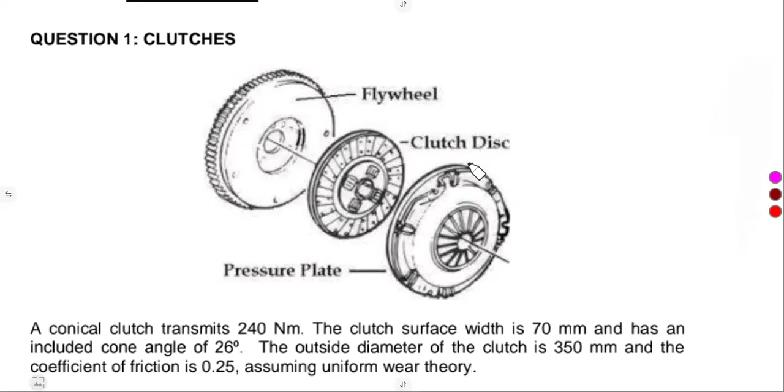So in this case, we are going to consider a typical exam revision, still working on our clutches as we had our formulas before. This part that we are given was from the April 2024 exam. They give us a typical diagram showing the flywheel, the clutch disc, and the pressure plate. The information given here was actually direct and straightforward.

So we're not going to waste our time, guys. Let us quickly take our information as we are given. This is a conical clutch that we are given, so we are dealing with a cone clutch.

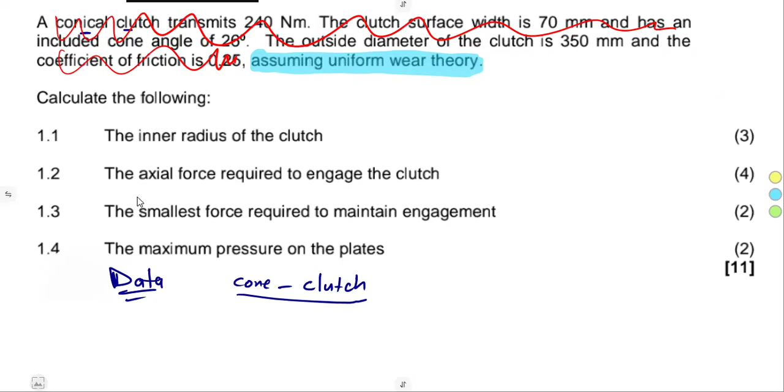Now, on the information, they are saying for this cone clutch, assume uniform wear theory. Remember, guys, I talked about this. As long as you are dealing with a cone clutch or a plate clutch, go back to the uniform wear theory or uniform pressure theory - they follow those two theories. So anyway, we are going to take that into consideration. As we are given here, this cone clutch follows the uniform theory.

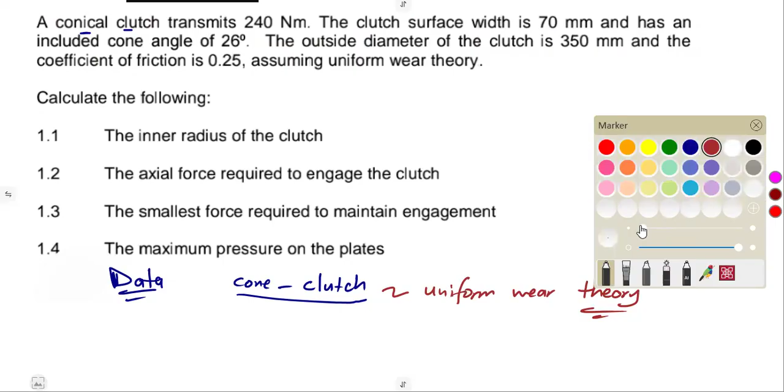That is the uniform wear theory. So in your calculations, you are supposed to put this into consideration. Remember, when you are working with the uniform wear theory, what exactly are you working with? You are working with the old or worn clutches.

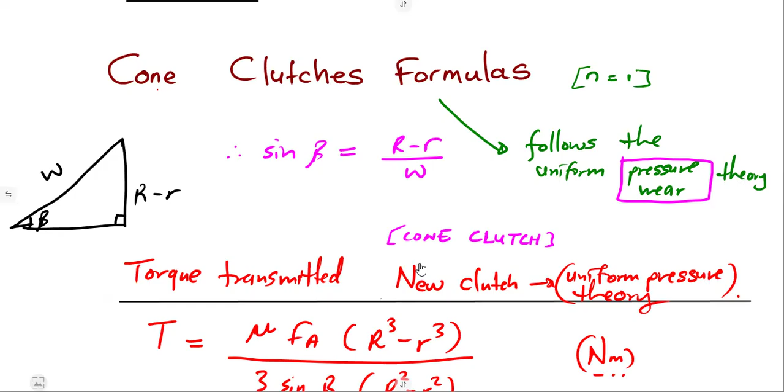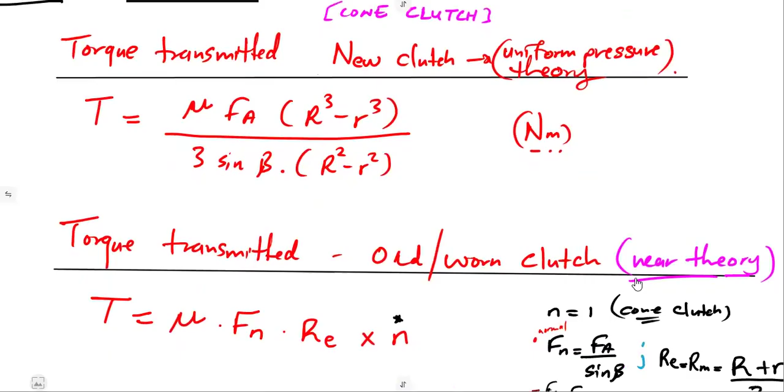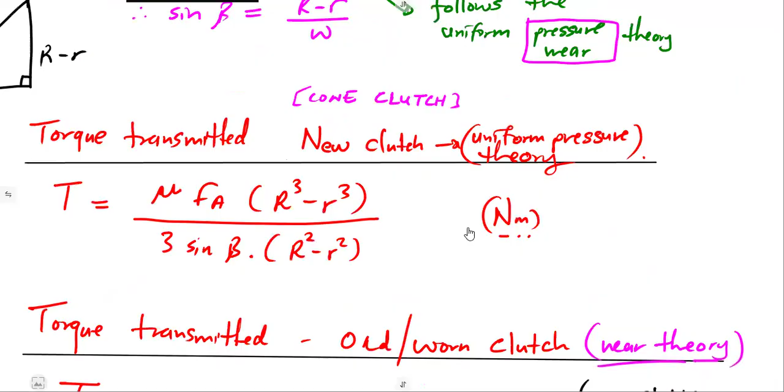Remember those formulas that I listed before. It is good that when we worked with cone clutches in our previous class, I mentioned what is important: the formulas for the new clutch, and also for the old clutch working with the wear theory. So we already listed these formulas specifically, mentioning each and every type that you are given. We do not have a problem with this part because we have the information. So let us take our information and see what we are given.

So we are given that it transmits 240 Newton meters - this is the torque that we are given. It transmits a torque of 240 Newton meters. Then the clutch surface width is 70 millimeters.

This is the width of the clutch. So the width of the clutch, if we divide by 1,000 since this is in millimeters, it becomes 0.07 in meters. Then it has an included cone angle of 26 degrees.

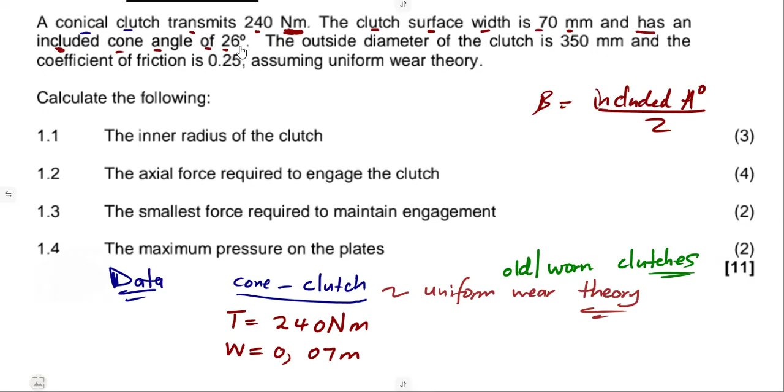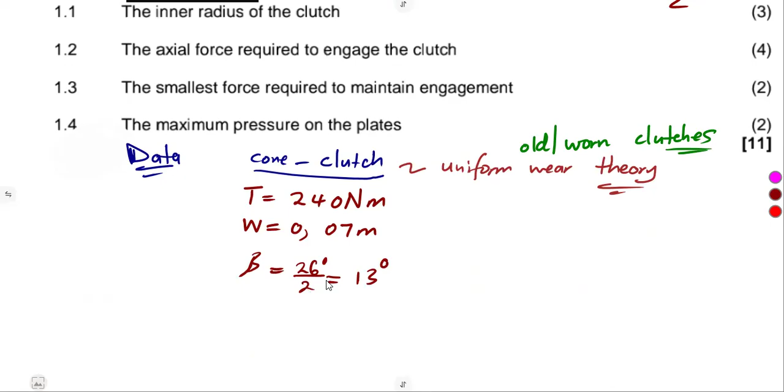Take note, included angle. So I told you guys, from the included angle, you obtain your beta - the included angle in degrees over 2 - that gives us our beta. So we divide 26 by 2 to obtain beta. Remember, beta is a semi-angle, a half angle - so it's half of the included angle. Unless they specify directly that it's a half angle, but since they say included, you divide that one by 2.

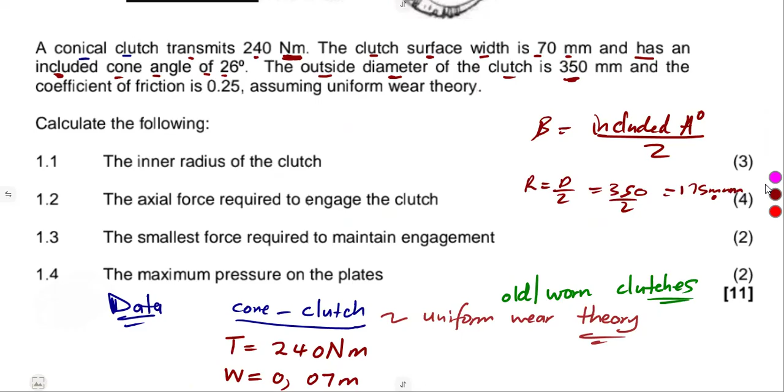The outside diameter of the clutch is 350. So we know that from this outside diameter, guys, we're going to obtain the outside radius. So 350 divided by 2 gives us 175 millimeters, then divide by 1,000 to get meters, so that gives us 0.175 in meters. And we are also given the coefficient of friction, which is 0.25.

Assuming wear theory as we are given there, the coefficient of friction is also given as 0.25. Remember, we are told it's a cone, which follows the uniform wear theory.

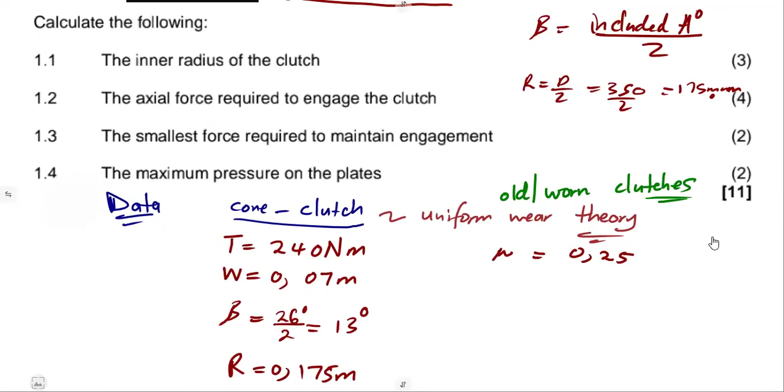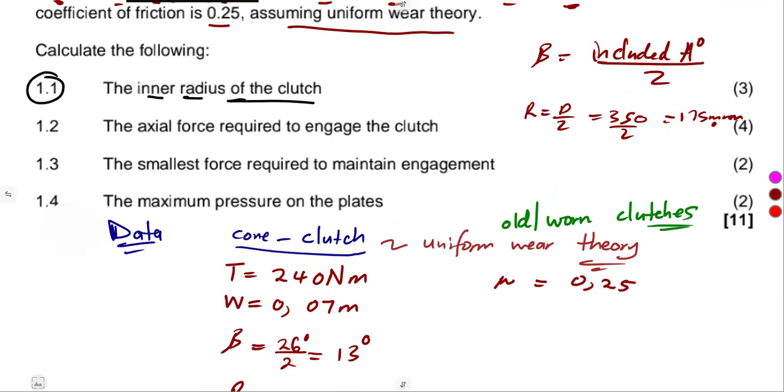So from this consideration, we now have the question, which was to calculate 1.1, the inner radius of the clutch. So when we had our introduction, even in those examples, guys, we had a typical question like this where the inner radius had to be calculated.

We have the width of the clutch here, remember? We have got the width of the clutch, we also have our outer radius, and also we have got our beta, our included angle. So we know that these can give us the missing radius that we are to find. So that is 1.1 - we need to determine the inner radius.

Remember, I explained this triangle concept that we can use to determine anything that is missing, provided that we are given any three from the formula. So there we are going to use this triangle, guys - that is the one you're going to draw. Then from that, you substitute your values. Remember, we say the sine of beta is equal to the opposite over the hypotenuse, which is this formula that we have here. So I'm not going to redraw that triangle, guys.

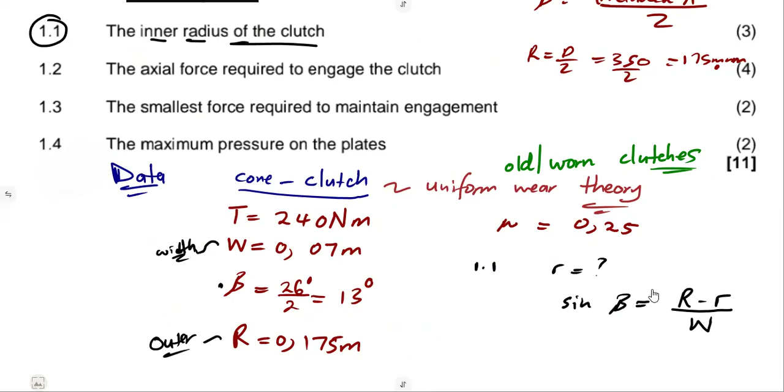All right, so this is the formula that we had at the end. Remember, guys, we had a question like this on examples, so this is just a repetition. What we need is the internal or inner radius.

So let us make it the subject. This is same as over 1, so we can cross multiply here. That's W times the sine of beta. These two cross multiply, so it's going to be W sine of beta, which is equal to 1 multiplying this part, that's R minus R that we have.

Remember, I want to make this the subject. It is carrying a negative where it is, so let us take this side so that it can be positive. Taking minus R to the right, the left side is going to be positive, meaning we are left with this one on the right side.

What about this part? We have to take it to the other side, we do not need it. Remember, we want to make this the subject, so the moment it crosses the equal sign, it becomes negative. So it was going to be negative W sine of beta, like this.

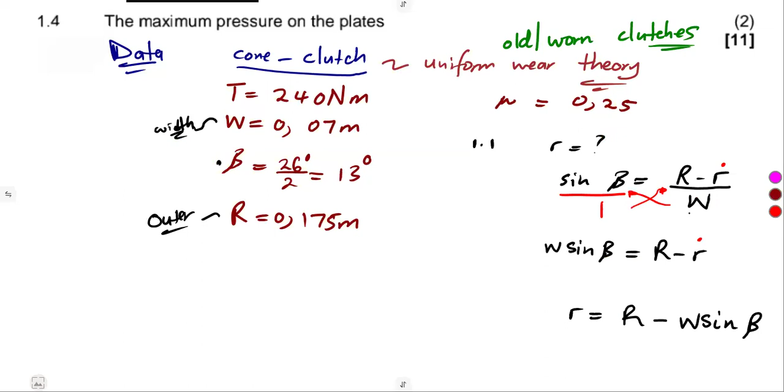So this is the formula, guys, that we have manipulated to make R the subject, where we can simply substitute these values as we have them. So our inner radius was going to be what? Since these values are in meters, it follows that our answer is going to be also in meters. So that's 0.

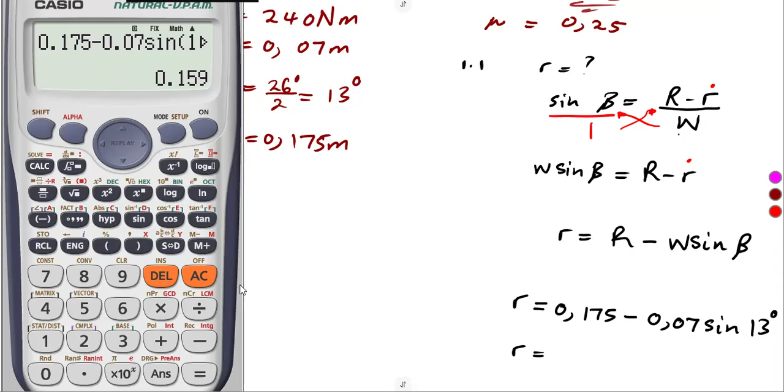0.175 minus our width of 0.07, the sine of beta, which is 13 degrees. So this is it, we were going to have our inner radius: 0.175 minus 0.07, the sine of 13 degrees, like this. So that's 0.159. We can even fix this to 3 decimal places: 0.159.

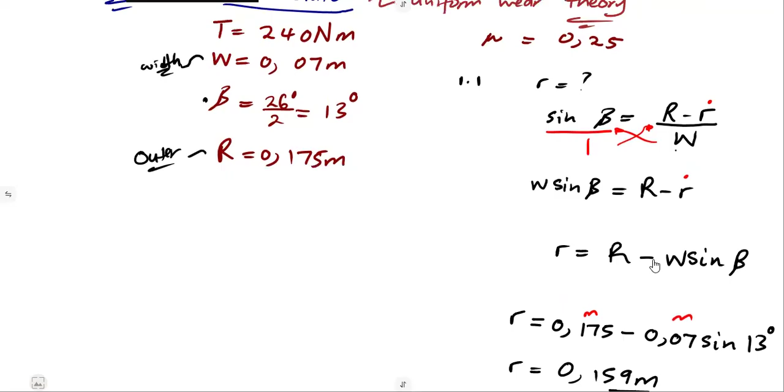Like I said, it is in meters. Since this one is in meters and this one is in meters, whatever we have there after subtracting is in meters also. So that's our inner radius. We're going to take it and save it in our information. So we just calculated our inner radius, and that was 0.159.

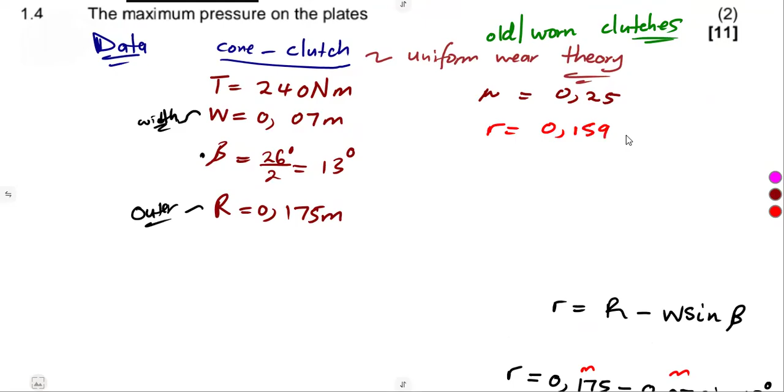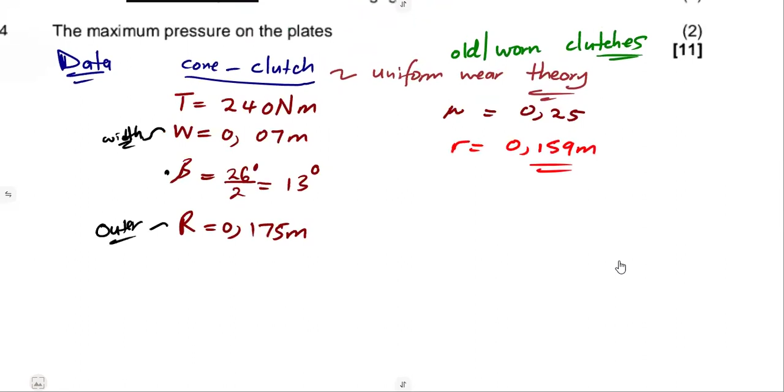In meters. You can even convert it to millimeters because you're not told whether to have your answer in meters or what. But for the sake of other calculations, we know we'll be dealing with meters, so it is best for us to have it in meters like that.

They said radius, not diameter, guys. This is inner radius. Find the radius, you end there. Do not multiply that one by 2. Multiplying by 2, you're now determining the diameter, which is not part of our question.

All right, then I talked about this. Maybe some of us did not understand me. I remember now, let me talk about it. If we remember when we talked about the torque, it's something else. It's no longer about this question that we just did. It's fine, we are done with this one.

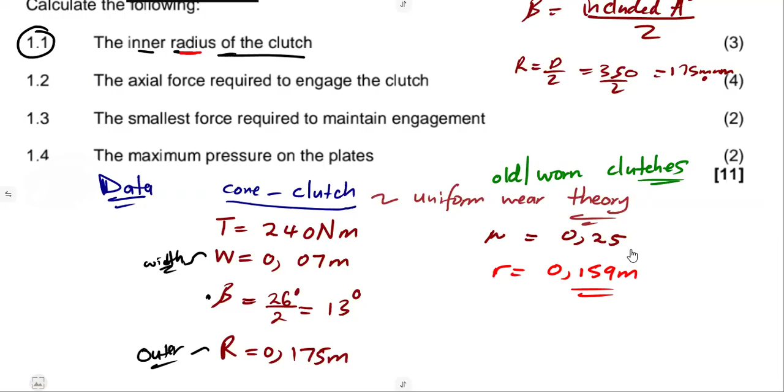Remember, I talked about the error that is in our textbook. That was the TVET series. Yeah, it's supposed to be the TVET series, which made a mistake. It was actually a mistake, and that one continued throughout. That's why I have to focus on this one, because it was not on one page but almost everywhere when they write about the torque that is transmitted.

All right, it is here. Sorry, I talked about it here so that we can be together. Remember when I talked about this formula, especially for those on membership, you can understand much because that's where I focused on that question, where this is the formula we are supposed to use to calculate the torque as long as we're dealing with old or worn clutches.

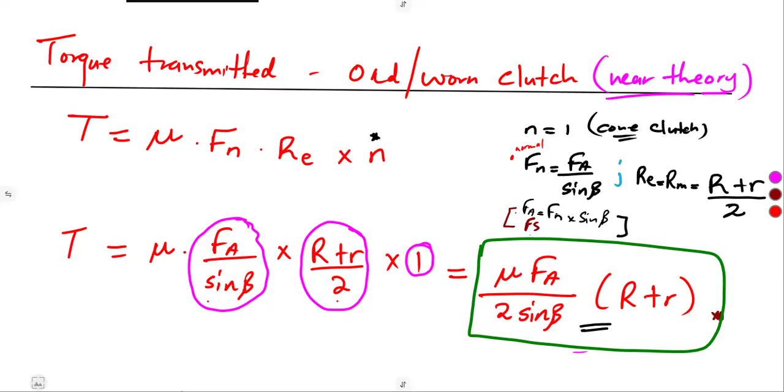That is wear theory, okay, I talked about this. The mistake was using a 4, right? On their formula, they used a 4. So if you check, they used a 4 throughout. I want us to confirm that, because I talked about this, that if we bring this information, all right, let me take my formula.

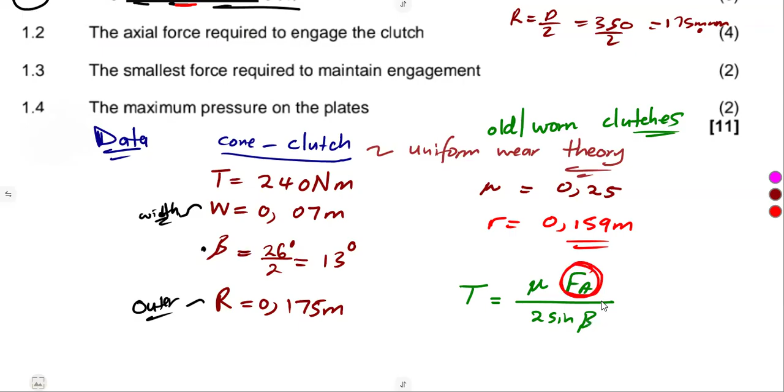I'm saying the torque is given as coefficient of friction times FA, everything over 2 sine of beta, like this. Let's say you have this FA, and you calculated or were given the axial force. In this case, we do not have that one, but let's say you have that axial force and you substitute it back. You are going to see that you get exactly the torque that you're given. But if you use the one with a 4, you won't get those answers.

So I want you to work out those as an individual, just try to see how these are going to work out. Remember, when you're dealing with the axial force, it depends on the condition given from the pressure that you're also working with, so we're not supposed to confuse that question. Anyways, we'll talk about it. I just remembered this when I saw this question here.

So, the axial force required to engage the clutch. Remember we talked about these formulas to engage the axial force. To engage, which we can write as FE, depending on your textbook or source, it is equivalent to FA into 1 plus coefficient of friction over the tan of beta. We listed these formulas previously, so it's not a problem here.

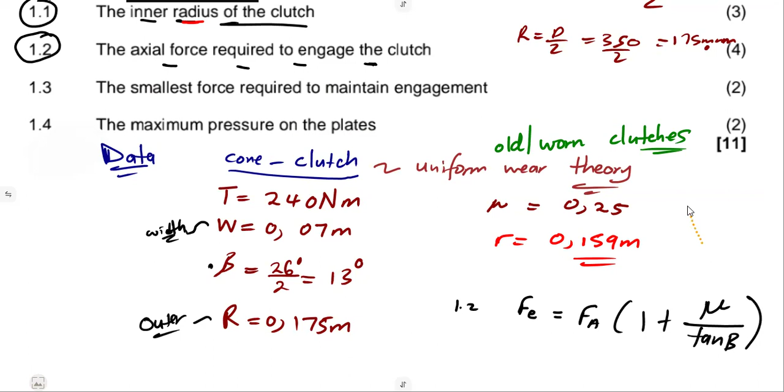We're just going to substitute, but we do not have this axial force, and in our case we do not have the coefficient of friction - we have it, the beta is there. So what is going to be the case to calculate that axial force? We're told our condition is that we're dealing with an old or worn clutch, so how are we going to calculate our axial force?

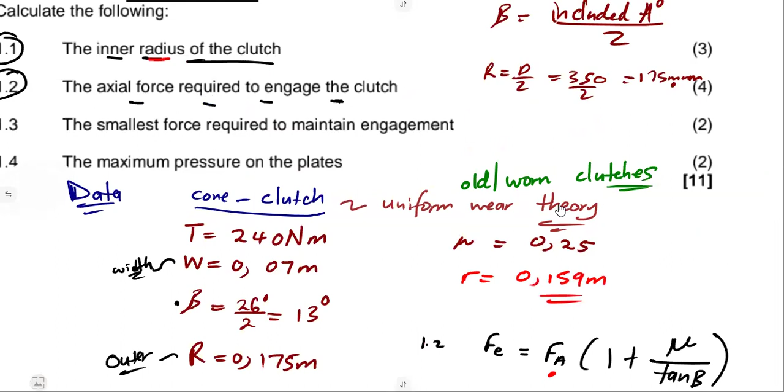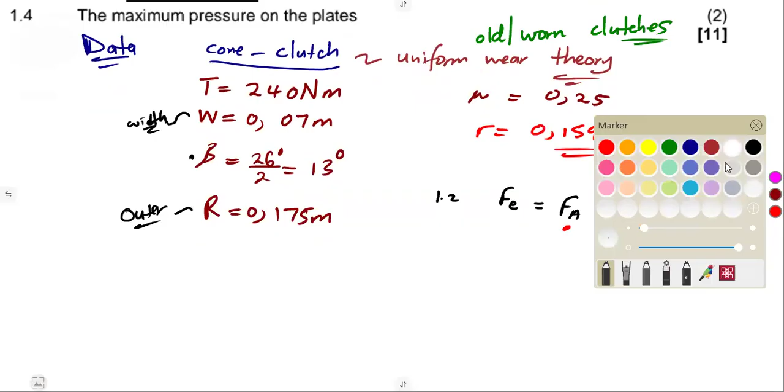Remember from our previous consideration, the axial force, sometimes you do not have to calculate it directly. We have to understand each other here. The axial force is the product when you're given, let's say, the normal force - it is the product of the normal force and the sine of beta. For the sake of understanding each other, if you still remember, for old clutches we talked about this - normal force times the sine of beta.

We had this part, but if you check again, we do not have that normal force. But we said the normal force can be found from this where we do not have that axial force. That's why we ended up with this formula, meaning the formula that gives us the normal force is the torque formula. So if this formula is wrong, or if you're using the wrong formula, guys, we end up having wrong values at the end of the day, because from this formula everything is there - the axial force is there.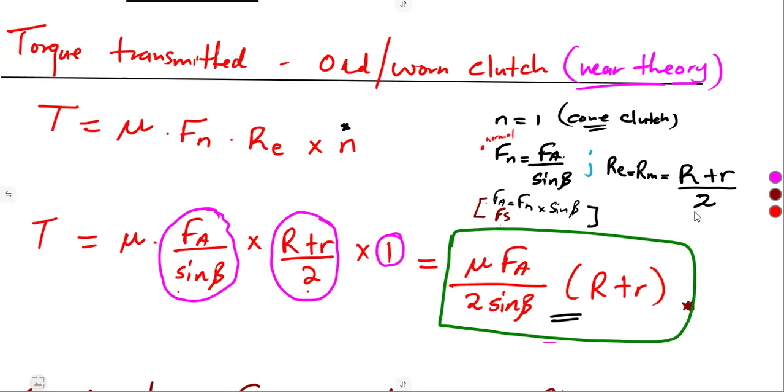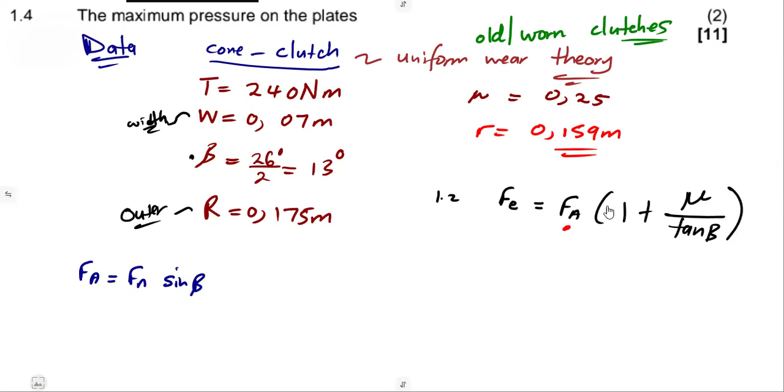So if you took a wrong formula, everything would be affected. I want you to see with this formula, that is direct, or from here - anything, we can have it from there. It's up to you the way you're going to have it. Let me explain from the first one. Let me do this, guys, I just hope you understand me here. So we said from that torque formula...

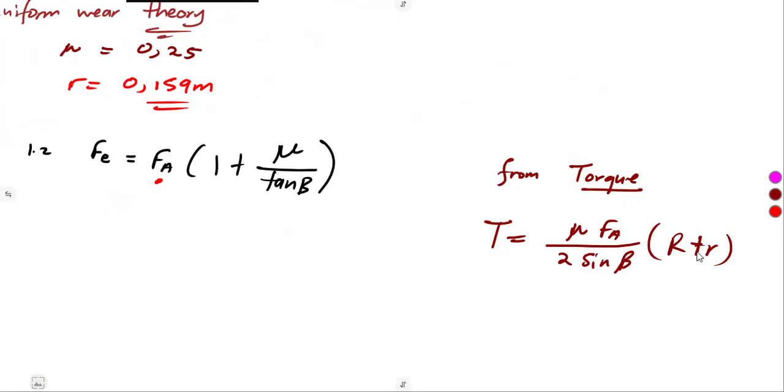The torque is given - we took that one, coefficient of friction, that is FA over 2 sine of beta, so this is 2 sine of beta into R plus R like that. So I explained where this part is coming from - this part over these two is our effective radius, remember that is R plus R over 2, so that is why it's supposed to be like that.

So we have that FA here, guys, we can see it, we can simply make it the subject. If we cross multiply, it was going to be 2 sine of beta times the torque that we're having, over what? We divide by the coefficient of friction into R plus R like this. So that was going to definitely give us this axial force, the one that we need here. So let us substitute our values and see.

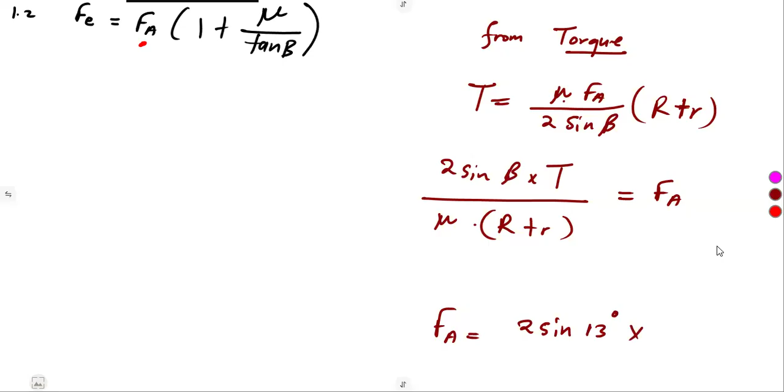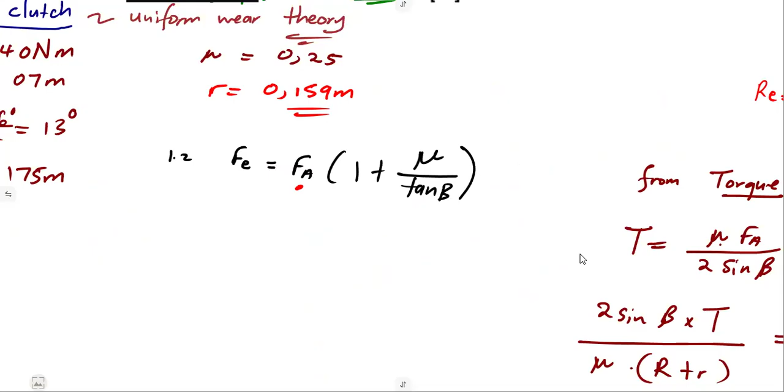So the axial force is equal to 2 sine of beta - remember our beta is 13 degrees - then our torque here is 240. I'm going to explain another formula also, that's why I was trying to find ways to explain this, guys, so you can understand me, but there's so many formulas, so many formulas. The coefficient of friction is 0.25 - let's hope this one is not going to affect us - 0.25.

This one is a product, but this is a sum, so we're going to add. Remember we just calculated this - our outer is 0.175, this is the inner, we calculated these two. So we calculated the outer and the inner - the outer was given, which is the outer radius, that was 0.175, and the inner radius we calculated, we got 0.159.

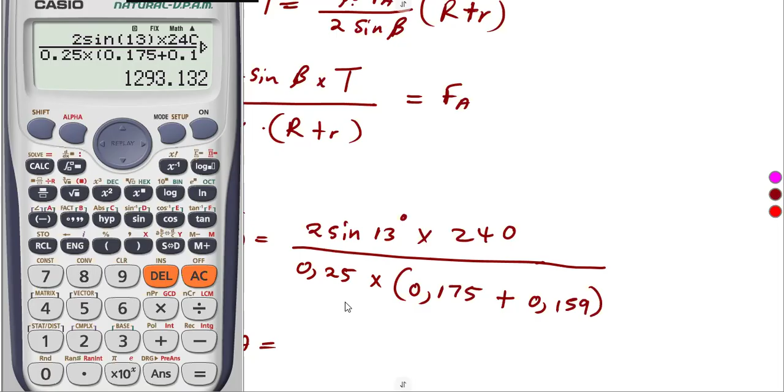So let us use our calculator and see what we're going to have as our axial force. That's 2 sine of 13 degrees, close that bracket, then times 240, all over 0.25 times - let's open a bracket there and add these, 0.175 plus 0.159. So this is what we're going to have as our axial force, which is 1,293.132 in Newton. So you saw the formula, guys, that I used there.

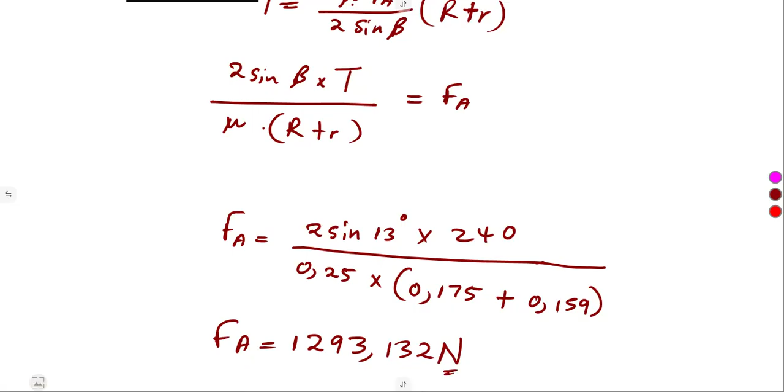The formula that I used has a 2 here. So for us to be very sure about this formula, let's take this into consideration to say the axial force could have been calculated from this. We are supposed to have the same answers. But remember, I said no matter the way that you understand, or the way that you do these calculations, there is one part that is not going to change.

This is the basic formula on how you calculate your torque. This one does not even change. It's the interpretation that changes on the formula there. So meaning to say, we will never get it wrong.

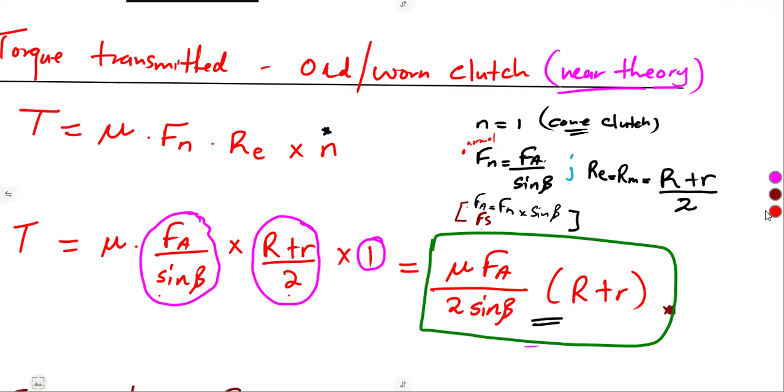This is the same formula that we ended up with when we made the subject of formula. If you remember, when we talked about this formula and made our Fn, the normal force, the subject, because in this case when you're dealing with a cone clutch, our N is equal to 1. So there's no need for us to even use that N, but we're supposed to make the subject and have it like this with N being 1. But there's no need because N is equal to 1. So meaning to say, this was the formula we were going to have at the end.

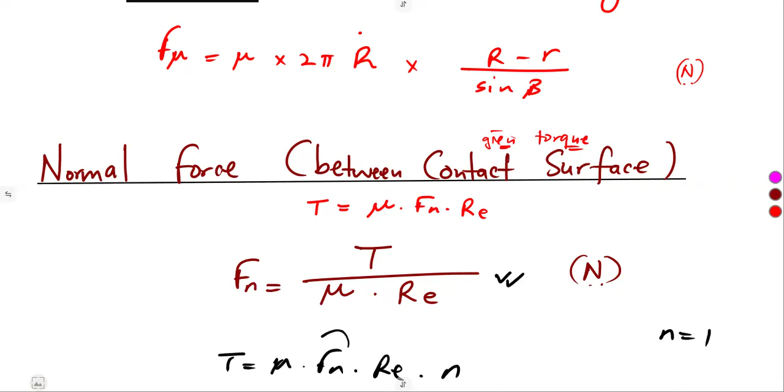If we manipulate from that torque formula, torque is equal to the product of these. That was our formula, then we simply made the normal force the subject. So the normal force was supposed to be calculated from this torque over the coefficient of friction times our effective radius times N, where N is 1.

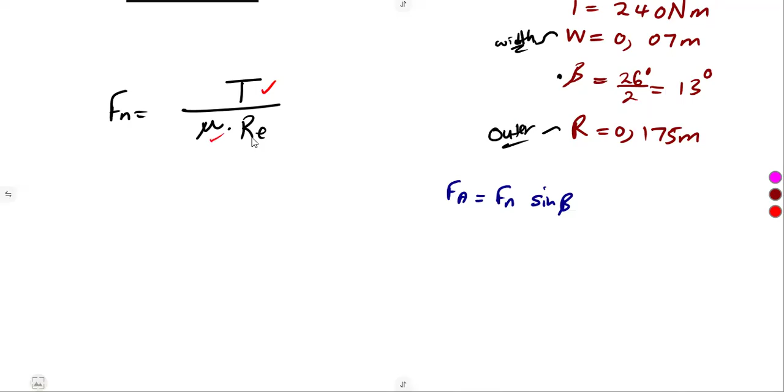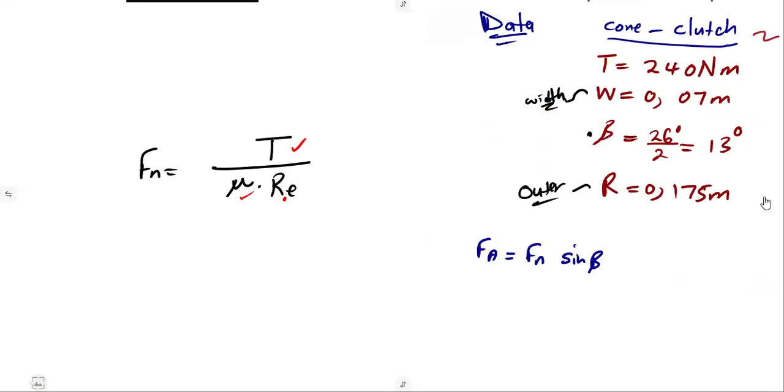So we ended up not considering that for a cone clutch, it is not even necessary to consider this. So we will see that we do not have our RE. Remember, we are dealing with worn or old clutches. Our effective radius is equivalent to the mean radius, which is simply R plus R over 2. So you are going to calculate that one.

Let's say you calculated, 0.175 plus the R that we calculated here, 0.159, over 2. You're going to calculate this and get something like 0.167 in meters. That's our effective radius for old clutches, or worn clutches, using the uniform wear theory. You have your effective radius.

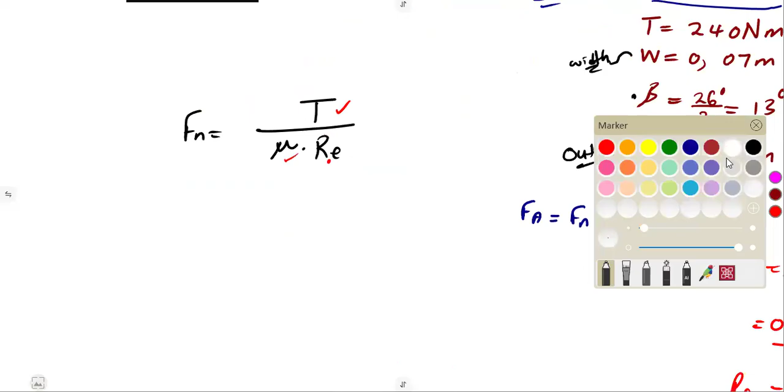Let us put this back into the calculation and find our normal force. So our normal force is the torque, which we're given as 240, over the coefficient of friction, remember that one, 0.25, times the effective radius which we just calculated, which is 0.167. So you're going to substitute this value.

Then you have your normal force. So your normal force was going to be something like 5,748.503. Let me take it like this so that we do not round off a lot of values.

With this normal force, you are then going to calculate your axial force from that product. Remember, we're dealing with a cone. So at the end of the day, our axial force is the product of the normal force times sine of beta. So we're going to take our normal force, 5,748.503, times the sine of beta, where our beta is 13 degrees.

So our axial force at the end of the day, if we were to multiply this, it was going to give us 1,293.132 Newton. As you can see, we are having the same answer as from the formula that we said was written wrong.

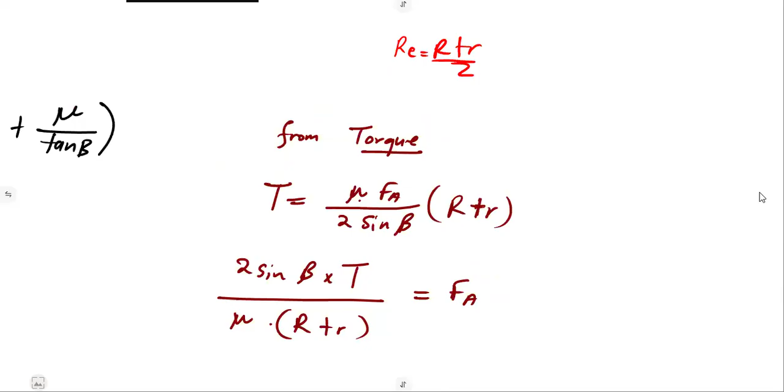So you can see that the textbook actually gave us a wrong formula, because if you are going to use a 4 here, let's say you put a 4, you're going to see that the answers would definitely be different in your calculations. And definitely that means everything was going to be wrong.

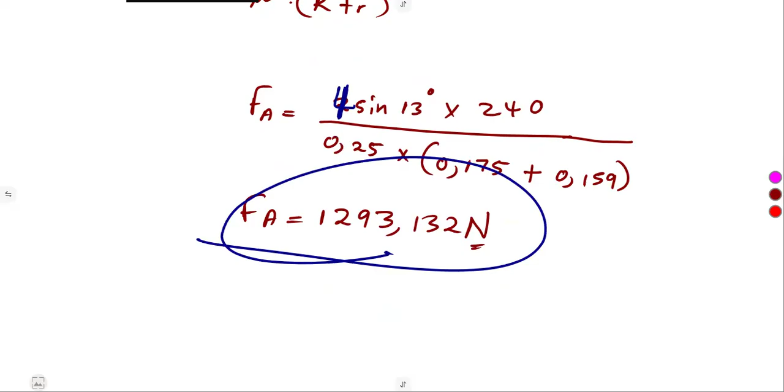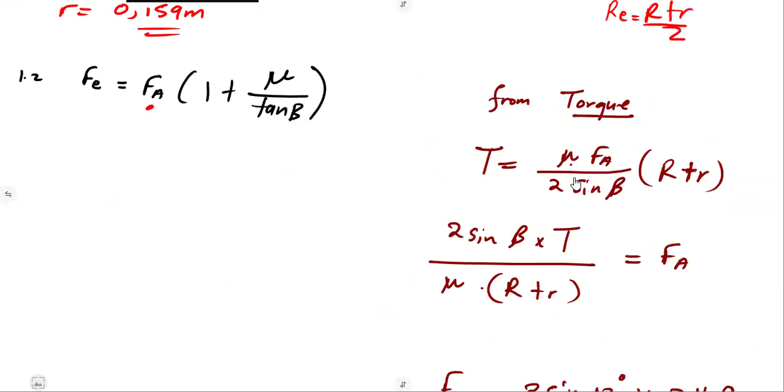If you put a 4 here from that formula, you will see that this answer was not going to correspond with this one that we calculated on this side. But as you can see, with this formula having these two and this part, we are having the same answers as if we are calculating something else. So this is to show you that mistake. I just hope on that part, guys, we are together now.

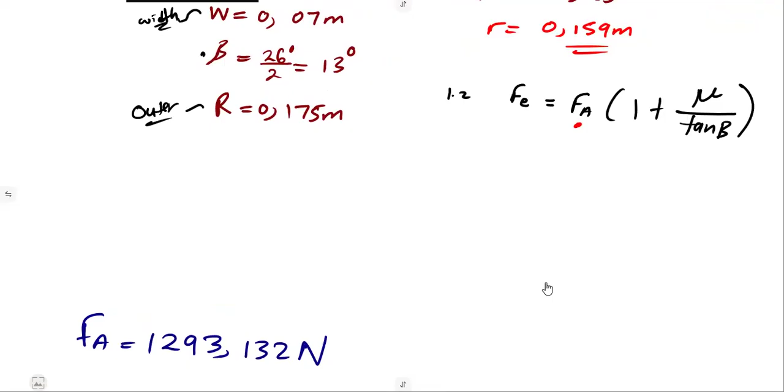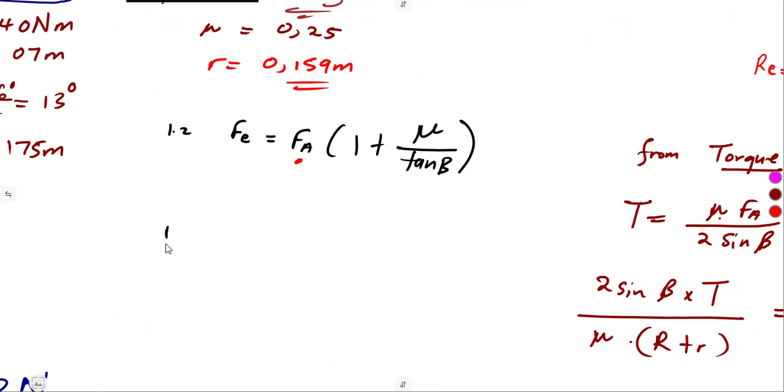So the question was to calculate the force to engage, not the axial force. So with that axial force, we now use it to calculate the force to engage the clutch. So the force to engage is going to be what? Our axial force that we calculated, which is this one. You're going to put this value as it is here.

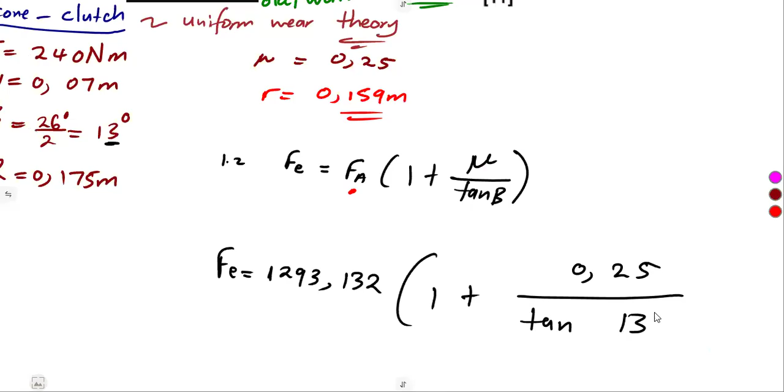So that was 1,293.132. Into what? You're going to substitute, as you can see, this part is as it is from the given information. So that's 1 plus the coefficient of friction of 0.25 over the tan of beta, where our beta is the angle of 13 degrees. So this part is clear, guys.

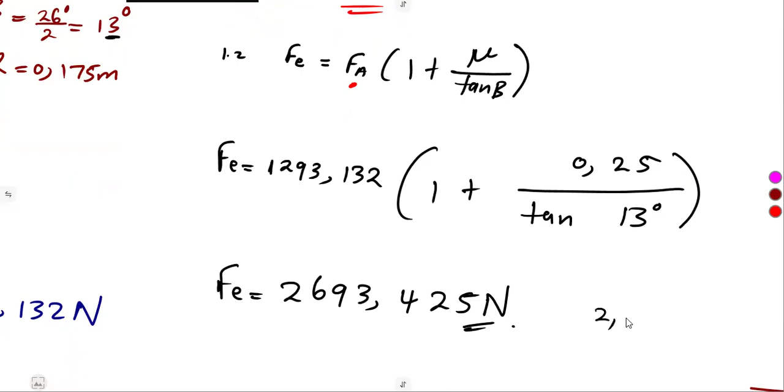It is now you and your calculator. So that was going to give us the force to engage of 2,693.425 in Newton. So that's it. You can even convert to kilonewton. It's going to be 2.693 kilonewton if you want to have it that way.

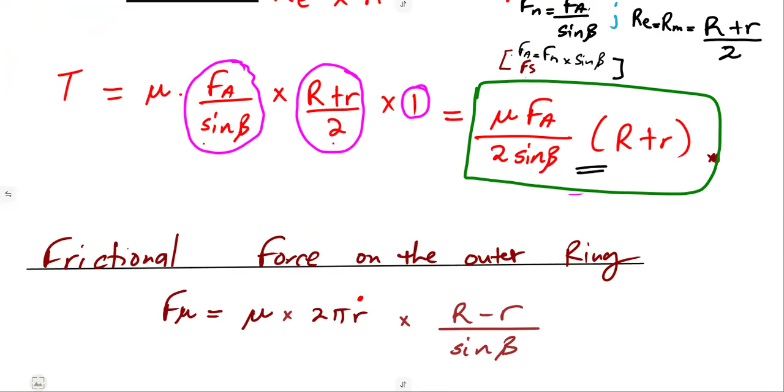As we can see, guys, either way, you can have the same answers. So it is up to you. You're going to pick, or take the axial force straight from the torque formula, because the axial force is there. Or you go through the calculation of the normal force on its own, then from there calculate your axial force, because it's the product of the normal force and the sine of beta. Remember, the axial force and the spring force are exactly the same. So once we calculated the axial force, we also calculated the spring force. I talked about that. So it is up to you guys how you pick or how you answer these questions.

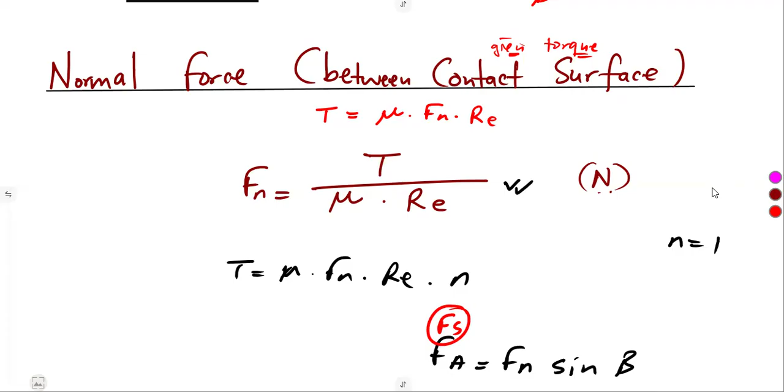Let us move on to another question. So that was the force to engage. To engage the clutch, definitely they will ask about something to disengage or to hold that engagement. Let's see if it is the case. But in most cases, that's how they ask these questions.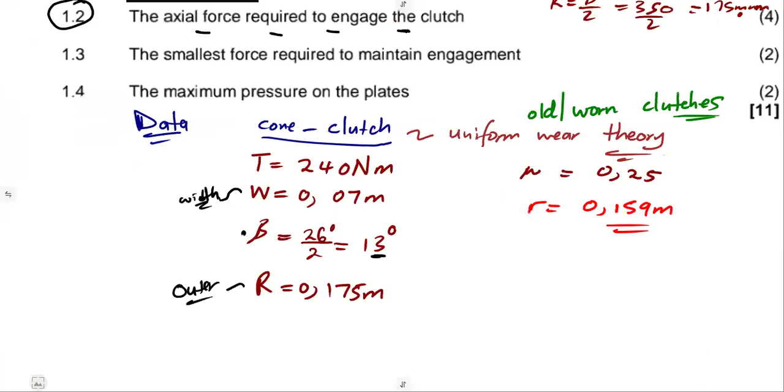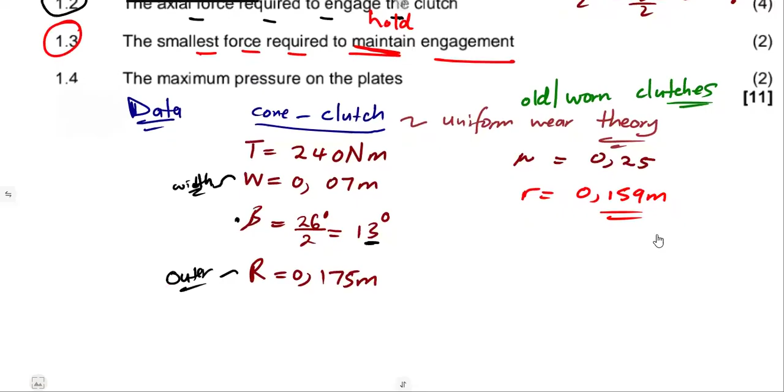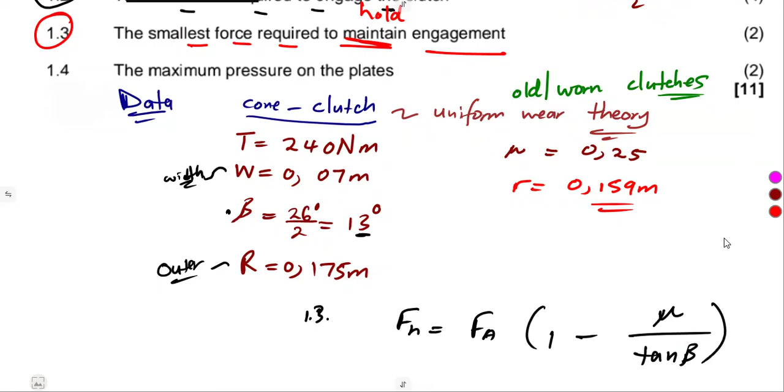You see, that is it exactly. So 1.3, the smallest force required to maintain, that is to hold engagement. Smallest force required to maintain, it is the force to hold that they are simply asking. So that's our FH. Remember, the difference is just that we are going to have a negative in our formula. That's the only part to hold, and that is the only part that is going to be having a negative. So from this consideration that we are having, you are going to put a negative in your formula. Then we can make our calculations.

As we can see, everything is already there. We calculated everything. The axial force, which is this one, 1,293.132, into 1 minus the coefficient of friction, 0.25, as it is, over the tan of beta.

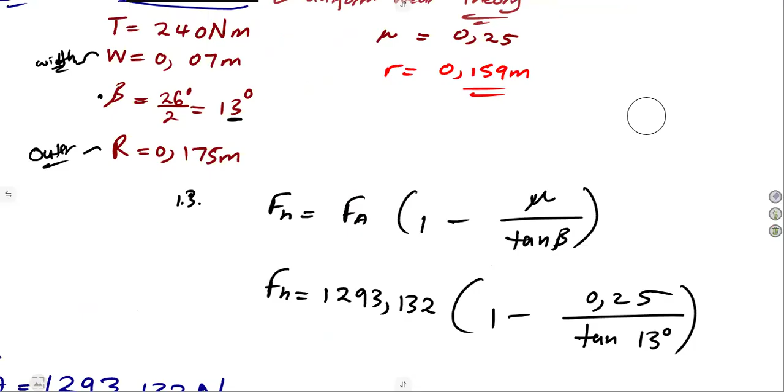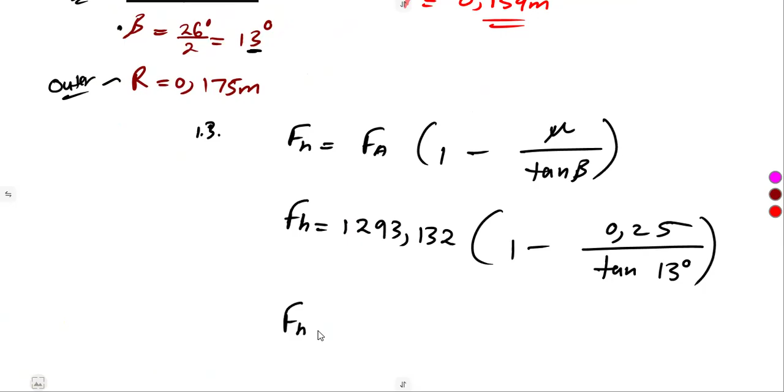Then there are others, I don't know, who are not comfortable with the point or the comma. I don't know the way that you understand it. If you take a point as a point, if you take a comma as a comma, that one is in your hands. We do not have this the way that it sounds the same. I talked about this before to say, call it the way that you call it. As long as you understand what I'm writing here, that is the most important thing. Because if you go to another country, it's differently specified. So it is you guys, it is you who call it the way that you call it. But as long as you see what I'm writing here, it is fine.

Because some of the comments, guys, that we get, you see, like this one does not even know what to say. Or you see some of the things, of all the things that you have learned as an individual, you find that one as a comment that you just put. Of all the things, some of the other things, we need to be reasonable as individuals preparing for exams, so that we know exactly what it is that you need. I just hope I did not sound bad.

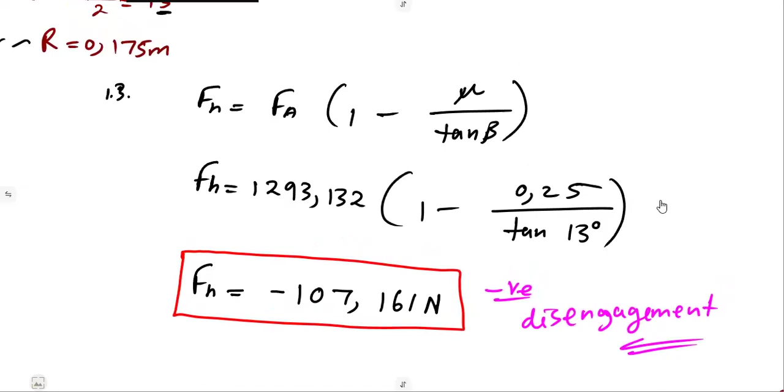So the negative there that I talked about is for the disengagement. But for N6, guys, we are not supposed to talk about these things. For N6, I think we are talking about people who are already mature enough to know what they want in terms of this education. Anyways, so 1.3, you've got your negative, it's a sign of disengagement. If you see it, it does not even matter whether you write that part or not. Just write your answer as it is. This is the force that holds that engagement.

So, guys, as you can see, these questions are direct and straightforward. After those formulas that we listed and the examples, now it is just like a play. It is supposed to be like that, especially when you are preparing for exams. Do revise these questions this way.

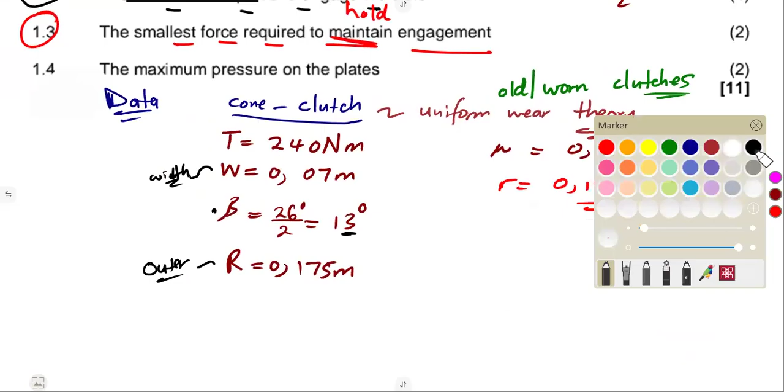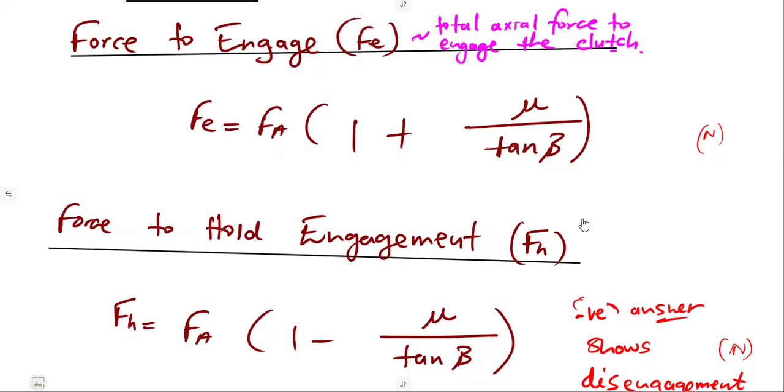All right, 1.4, the maximum pressure on the plates. Why are they saying maximum pressure there? Remember, when we are dealing with these clutches, you don't just talk about pressure generically. The pressure has to be specifically mentioned to say which one we are talking about, because the axial force, as it was calculated, remember these are the formulas for old clutches. The axial force, when it is to be calculated separately, we take that one and say this is our axial force, which was supposed to be calculated from any of these formulas.

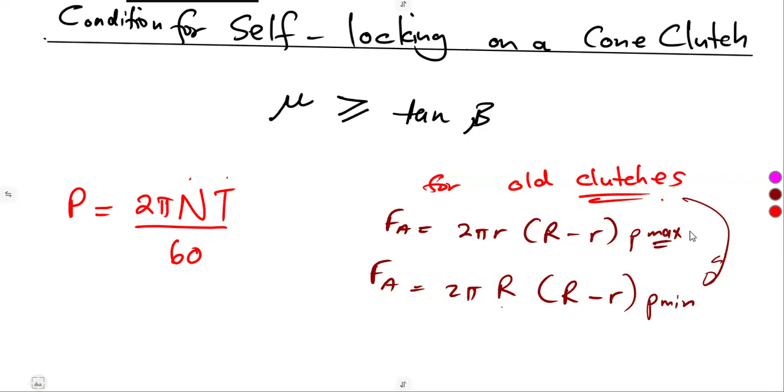So if they specifically mention that it is the maximum, where the maximum pressure is, we know that we'll be dealing with the inner radius in our calculations. So it is from the axial force. For old clutches, it must be specifically mentioned - we have to be honest about that. So from the axial force, we saw that the maximum is from this formula: 2 pi r times (r outer minus r inner) times p max.

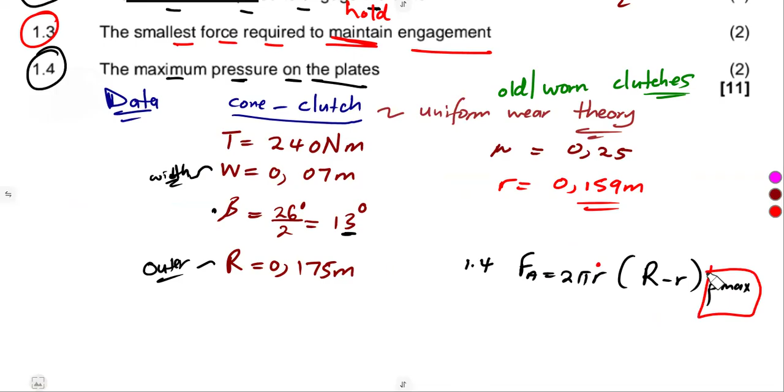So take note, there is the inner radius that you're working with - that's our maximum pressure. So let us simply make it the subject of the formula. We're going to divide by this whole part here as it is. So our maximum pressure is going to be the axial force over 2 pi r times (r outer minus r inner).

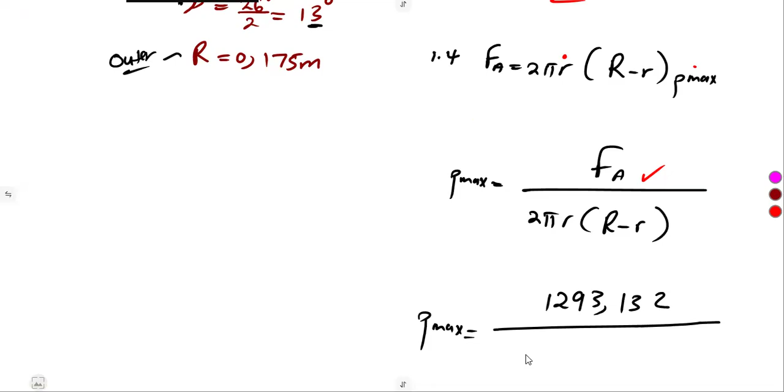Going to substitute our values straightforward. So our maximum pressure is going to be equivalent to the axial force, which we calculated separately - remember that was 1293.132 - over 2 pi times the inner radius, which is 0.159. Then the difference here, outer minus inner: outer is 0.175, subtract the inner which is 0.159.

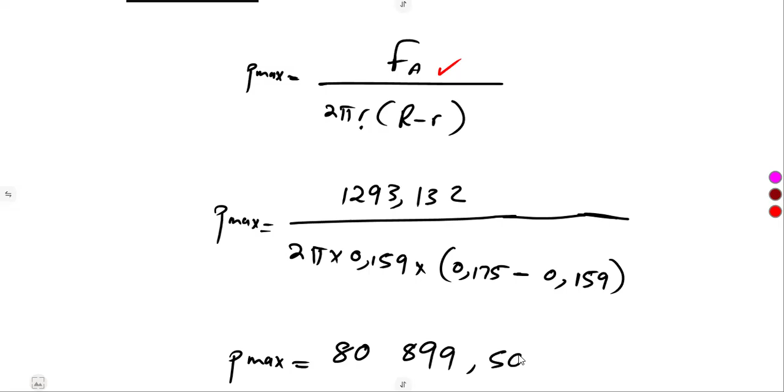So if we simplify properly, that gives us the maximum pressure of 80,899.509 Pascal. Remember, this is pressure measured in Pascal, which we can convert to kilopascal by dividing by 1,000 - so that becomes 80.899 kilopascal. So that is how we are supposed to handle these questions.